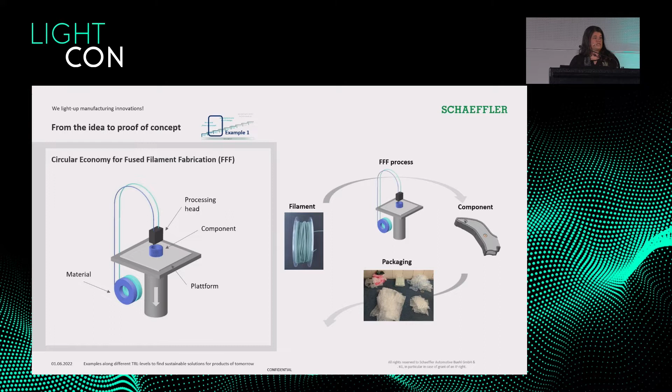Well, from first samples, you also have the thing of packaging everything, then you spread out, you have it locally. And then we said, okay, now we can produce locally, we can save a lot of logistics, we can save packaging material, we can save a lot of things. However, there is still the thing that packaging is also generated elsewhere. So we do have a lot of packaging waste, and so we had the vision to introduce circular economy for the technology fused filament fabrication by just using our packaging waste.

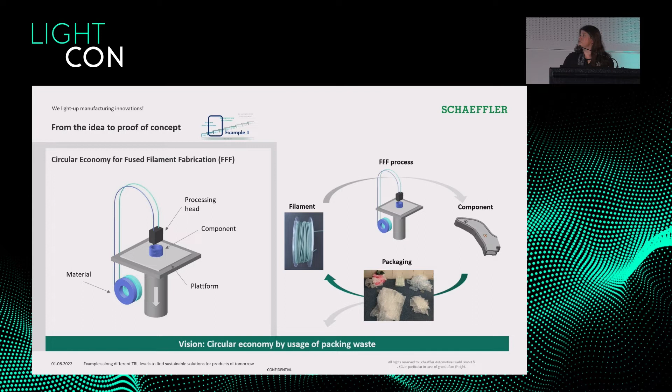And how can you do so? The process looks like that. You just collect the polymer waste. It's important that you have thermoplastics, that you can use the plastics. And so far, we focused on a collection in our sites for blister foils because they're very easy to identify as a thermoplastic material. Of course, there are some more, but for the beginning, this is easy to identify. Then we did the first example here to have a proof of concept if that could work.

So we shredded the foils. There we had a lessons learned. It's not so easy to shred blister foils because they're weak. So the lessons learned was to stiffen the material by having some pre-melting with hot air. But we generally can generate zero loss of material. Then you compound that, add some fillings, and you end up having that filament which can be used on the printer.

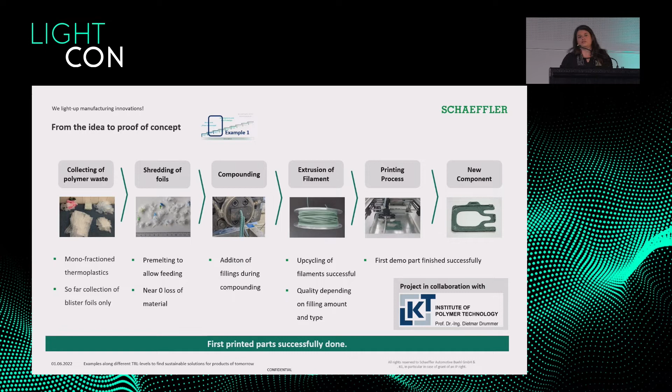That worked quite well, so we just recently had the first proof of concept done and printed with an FFF printing machine locally. Such a holder, that's just the first sample coming out. Card holder, as you maybe also know it from your company, where you can stick in your card. And now we're going, of course, the next steps forward. And we're doing that in collaboration with the department of Mr. Drummer in Erlangen.

So now you could say, okay, well, that's circular economy, but is there any other benefit of that? And of course there is, because what you can see here is the waste which is generated only in Germany in 2019 for the whole industry. And if you look into the industry, 12.3 tons of primary plastics has been used. And the recycling quota out of that is less than 14. So there's a lot of potential to do better. And also what you can see listed here is the thermoplastics is a fairly high amount, so it's quite easy to have a good first step into.

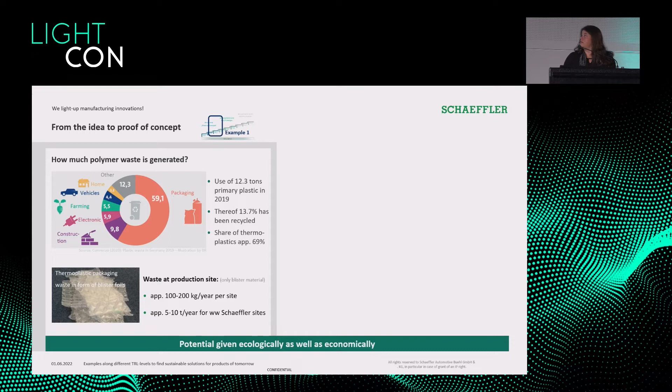And we calculated what kind of waste is produced. So we have, only with the blister foils in our production sites, around 100 to 200 kilograms of blister foil waste every year. And we have, as you've seen at the beginning, more than 50 sites. So if I just multiply it by 50, that's a lot of waste which we can use. And that this is also economically and ecologically feasible can be listed here.

So we first had the machines being placed locally. Now we collect the waste locally, and we can produce different kinds of parts in the future. That can be for production sites, some toolings, guide rails, whatever is necessary, and can be printed out of those foils. And this is quite a large number. I tried to figure it out on the right-hand side below. If you count like 200 grams such a part can weigh, of course it's just a rough estimation, you can fabricate out of only your blister foil waste 500 to 1,000 components every year per site.

And this equals, if you calculate the price for such filaments, up to 2,000 or 4,000 euros. So it's quite worthwhile, and we're quite happy that we did the first proof of concept, which worked, and are going now much deeper into that topic.

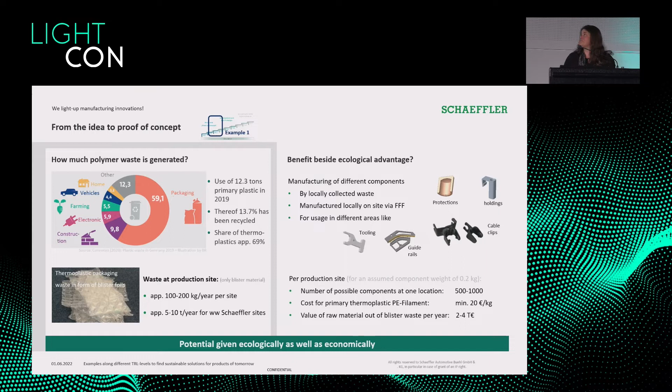Coming to the second example, as you've seen before, we have a lot of different branches where our products go to, and one of them is aircraft applications. So we have bearings which go in such turbines. You can see here illustrated where the bearings are located in the turbine. And especially during takeoff, such bearings, or airplanes in general, have a lot of stress on all the components in the turbine. So the idea was, how could we do any improvements on that?

And the idea was, if you look at how to reduce such friction which occurs during the stressing of the bearing, we came up with the idea to simply cool the bearings down, so that you reduce the temperature, you reduce the friction, and have improvements which can be reuse of lubrication, longer lifetime, but also lower temperatures. Or on the other side, if you keep the temperature the same, you can increase the power densities and the engine speeds, basically.

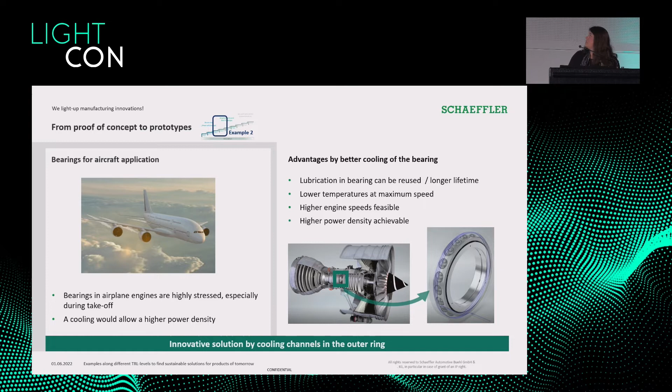So how can you do so? First of all, what you can see here is a typical cross-section of a bearing with an inner ring, the cage, the ball bearing inside, and an outer ring. And what you can see here is there are some millings done to establish some cooling channels.

And to generate those cooling channels with conventional technologies, you have to halve the outer ring first, you have to mill it all, then you have to bring it together and have a two-ring assembly on top to be able to have such cooling channels established at all.

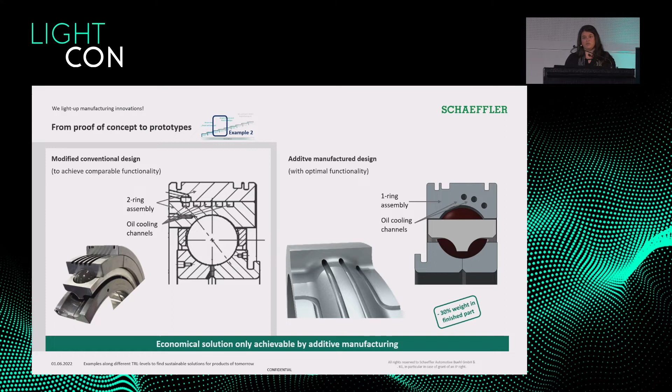So here we had a look into different process technologies and also designs, and came up with the idea of having these channels done by additive manufacturing. I'll hurry up. So here the advantage is you only have one ring. You can place the channels quite close to the raceway, and you end up having 30% less material, which can be used afterwards. And every kind of material saving is some kind of CO2 saving at the end.

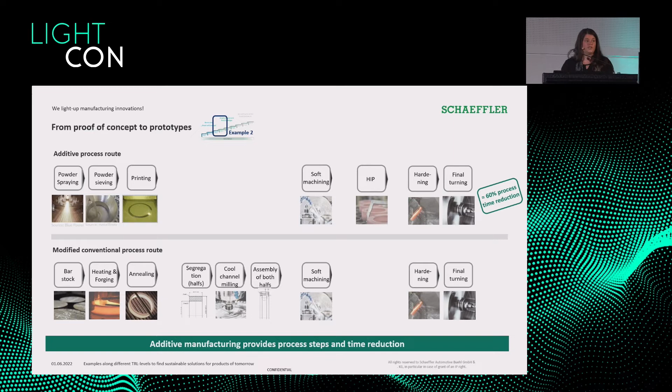And here you can also see a comparison of the different process chains. The upper one is for the additive route, and the other one would be for conventional technologies. You have here in the middle the different process steps to be able to install the channels at all. And the rest, besides the HIP process, is the same. But also besides the 30% of material saving, you would have here a 60% time saving for the process steps. And that this works is shown here.

So you can see from the left-hand to the right-hand side of the pictures the temperature, which is rising. And as a summary, for the bearing done by additive manufacturing, you can reach up to a 40-degree decrease in temperature, just due to the channels and also the position of the channels, which is much closer to the raceway. And maybe just have a look at the right lower corner. Then you can save some oil, which is of course CO2 reduction. You have power loss reduction, and temperature reduction in operating time.

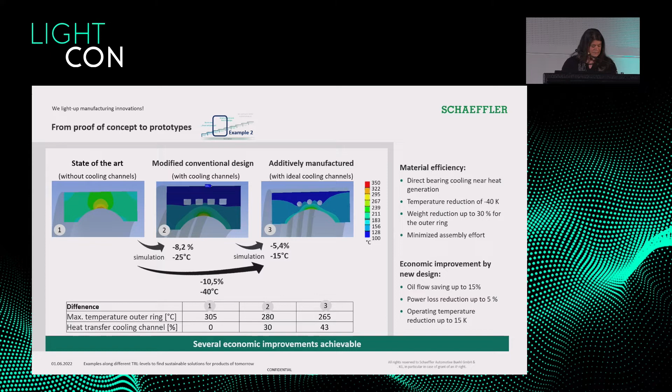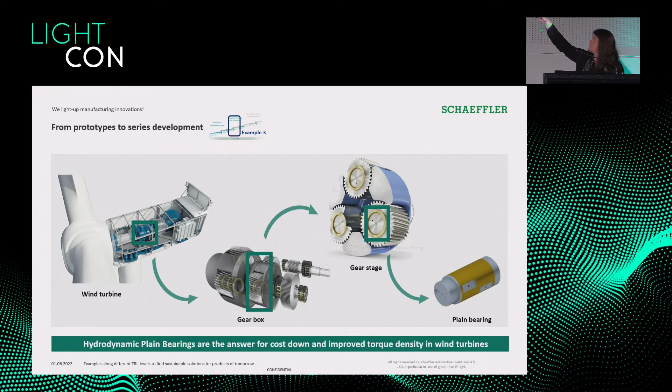And then a quick look into our third example. This is a little bit more work in progress, coming from the wind turbines. So here you have plain bearings which sit inside a gear stage in the gearbox. And state of the art here is that you use some bronze, so the golden part on the pin is the bronze, which is usually cast.

And by casting such a bush, you need a lot of different sizes for the geometries. You only have a press fit of the material. You need a lot of material, 30.6 kilograms with the traditional route. And there are a lot of process steps, only some limited ones displayed here.

Now we're going to change the technology and go into a laser-cladding process route. There, of course, you have the advantage that you're totally flexible for the geometry. You have a very strong bond between the materials, and you have less material usage, which is only 2.9 kilograms. And here you can save up to 95% of CO2 compared to this process. And also a reduction in process steps, so there are several other advantages in saving some process time and also cost.

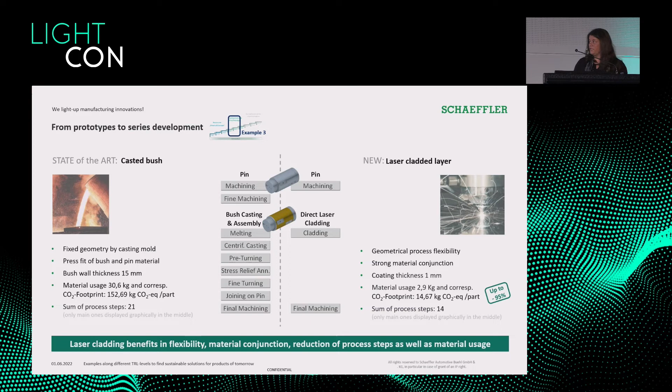And this conference is called Circular Economy, so I tried to also point out how we look deeper into that. So we have already established the process for development. You go typically from studies to material testing to sampling and test rigs, and some calculations, always assisted by process simulations, which is very helpful to gain some new ideas and new insight into the interaction between all the parameters and the material.

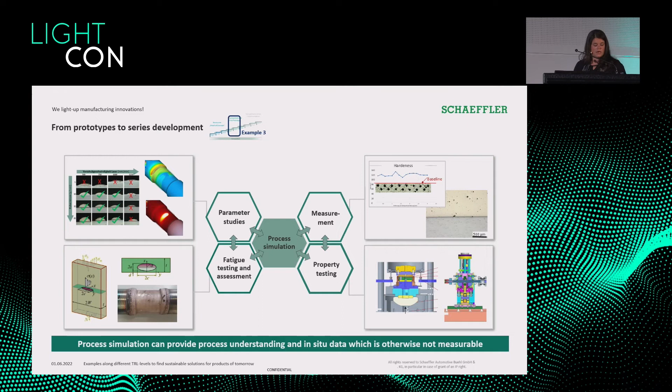And then once this is established, and this is where we are right now, we think of how to make it even better with circular economy and how to increase the CO2 reduction even more. So basically you start off from the powder raw material, then you have your process, and afterwards your component. And of the improvements by circular economy, the first one comes from the powder material. Here we are talking about increasing the amount of secondary material used to produce the powder. This makes up to 15% CO2 reduction possible, even more if you can increase it further, but this seems to be the limit at the moment.

And for the process itself, you have some kind of overspray, and here we have now a new concept how to collect the overspray, how to rework the overspray powder, to really also bring it back into the process to really have ideally zero waste out of your powder. And this also makes up to at least 15%, up to 20%, where you can decrease your CO2 footprint, which is pure circular economy of the powder which is used in the process.

Of course, you can also have some look into the component, when it's machined afterwards, if there are some possibilities. And for CO2 reductions, you have some further ones. For example, with the parameters from the process, how you can further increase that or improve that. And also from the output, which is coming from the powder production. But as I said, main input is for those two, which is pure circular economy, and is now going into real development to bring it into serial production afterwards.

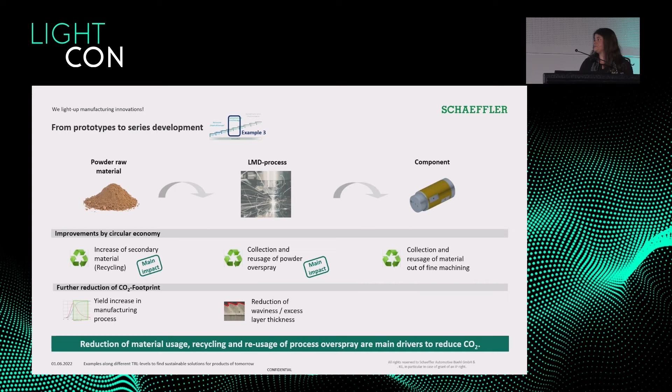And last but not least, I'd like to say we have with manufacturing technologies possible solutions to make our world even better. It's good today, but to make it even better, especially for CO2 reductions and circular economy.